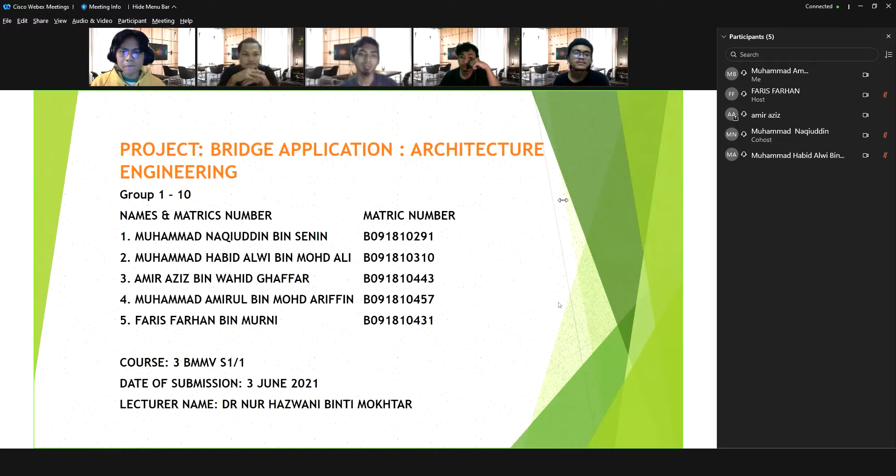For the background, a bridge is a construction meant for carrying road traffic or other moving loads in order to pass through an obstacle or other construction. The required passage may be for pedestrians, a road, a railway, a canal, or a pipeline. Obstacles can be rivers, valleys, sea, channels, and other constructions such as bridges themselves, buildings, railways, or roads.

A bridge is a structure that provides passage over obstacles such as a valley, rough terrain, or bodies of water by spanning those obstacles with natural or man-made materials. They first began to be used in ancient times when the first modern civilizations started rising in Mesopotamia. From that point on, knowledge, engineering, and manufacture of new bridge building materials spread beyond their borders, enabling slow but steady adoption of bridges all across the world.

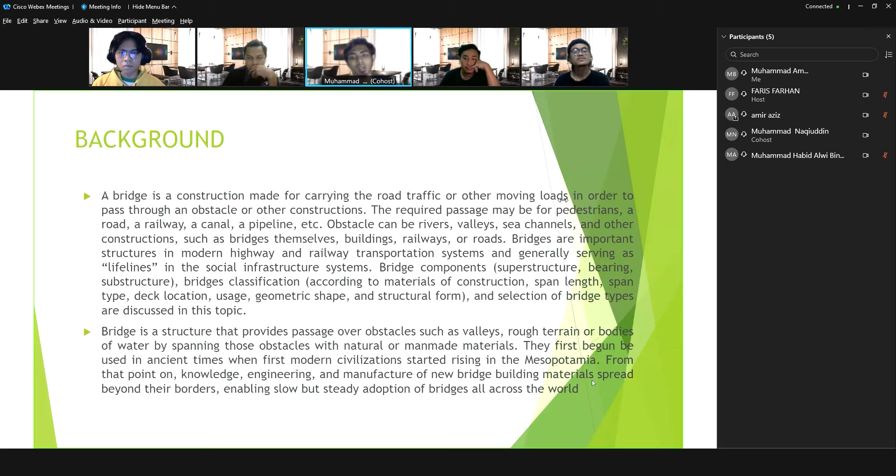For the problem statement, a bridge is a structure that spans a valley, body of water, roadway, rail tracks, or any other obstruction to continuous travel. Bridges are also designed to withstand dead loads and live loads. A dead load is a load that does not change, such as the weight of the structure itself. This load accounts for a significant and considerable percentage of the stress in the load carrying member. A live load can change, due to increase or decrease in traffic and pedestrian loading.

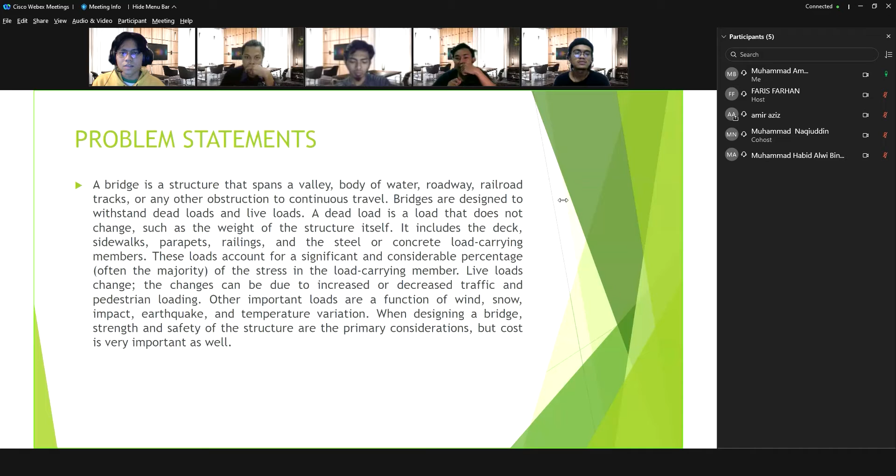For the objectives, we have three. First, develop an understanding of the requirements of the materials used in bridge construction. Second, understand how each bridge structure works to carry the loads placed on the bridge. Third, analyze important aspects of construction such as strength and placement of materials.

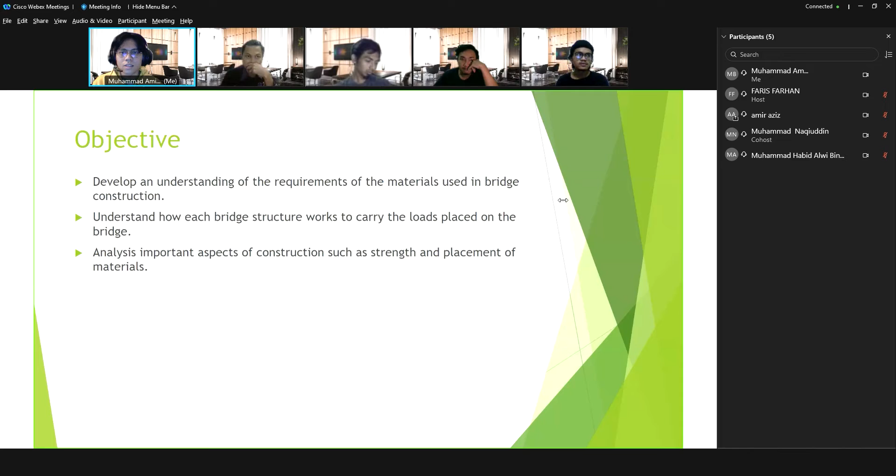For the literature review, we start with materials used in bridge construction. According to Composites and Jin 2006 journal, making carbon fiber composite material into strands and rods and then mixing them with steel bars for bridge construction is the most common application of carbon fiber composite materials. Carbon fiber composite material was made into strands and first used in the construction of a high-speed post-tension pre-stressed concrete bridge in Germany in the early 1990s, where a wedge-shaped bridge anchoring system was used.

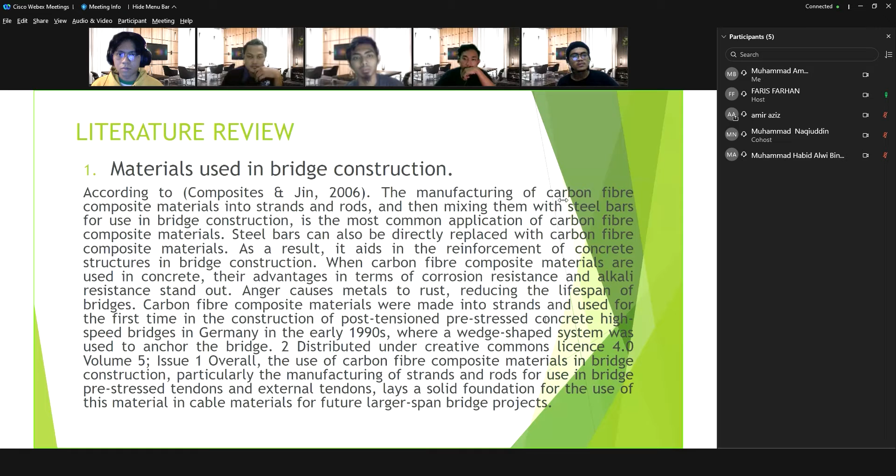Next, how each bridge design works. The bridge model lower chord had four bearing pads to ensure proper truss behavior, based on Bačinskas et al. 2017 journal. Pin and roller supports were placed near the first and 11th floor beams respectively, under the bearing pads. To monitor the deflection of the bottom chord, linear variable displacement transducers were used as displacement gauges (DG).

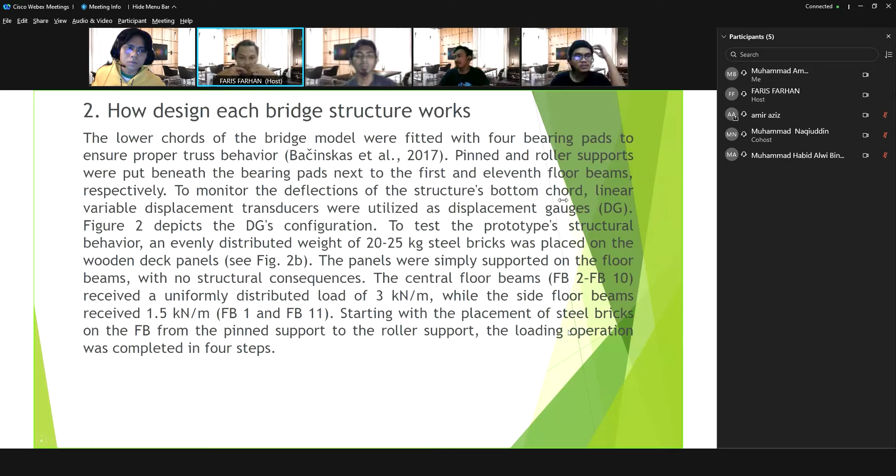The loading operation was completed in 4 steps, starting with the placement of steel bricks on the floor beams, from pin support to roller support. Next, the arrangement of the displacement gauges is shown in figure A and figure C, showing load distribution on a wooden bridge deck.

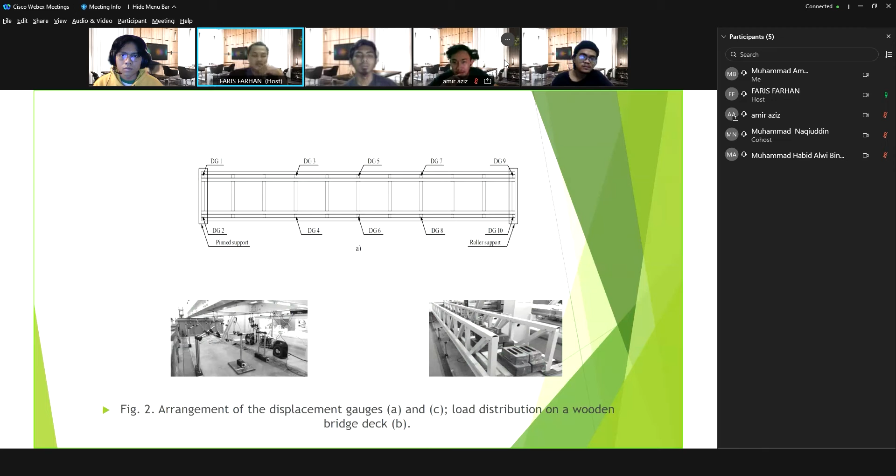For strength and placement of materials, an experimental investigation of a pedestrian bridge model composed of GFRP profile is presented in this work, based on Bačinskas et al. 2017. Post-static loading was used to evaluate the bridge prototype. The maximum load is 13.3 kilonewton. A numerical model was created using the CAD software SolidWorks to compare experimental and theoretical results.

According to the findings, the manufacturer of the GFRP profile announced a conservative modulus of elasticity resulting in increased structural stiffness. When the nominal value of Young's modulus is taken into account, deflection inaccuracy ranges from 29.3 to 43.9%. Considering the experimentally obtained average value, the margin of error at maximal loading is just 0.3%. More research is needed to analyze the dynamic behavior of GFRP composite bridges as well as their long-term consequences.

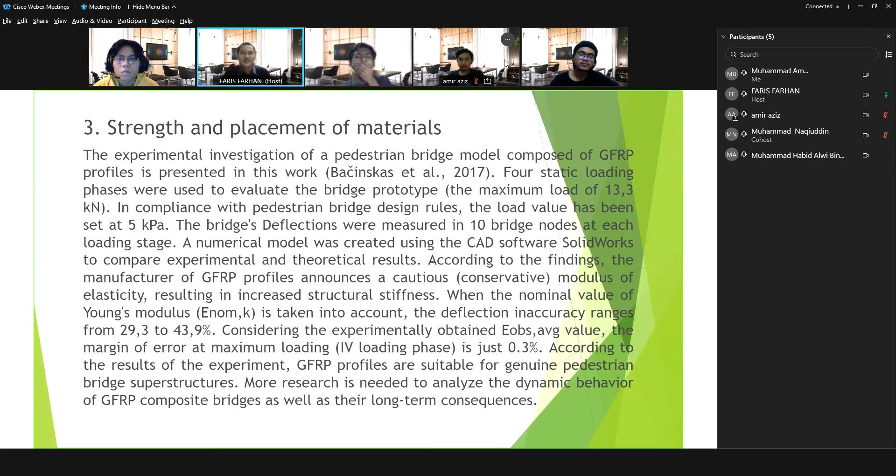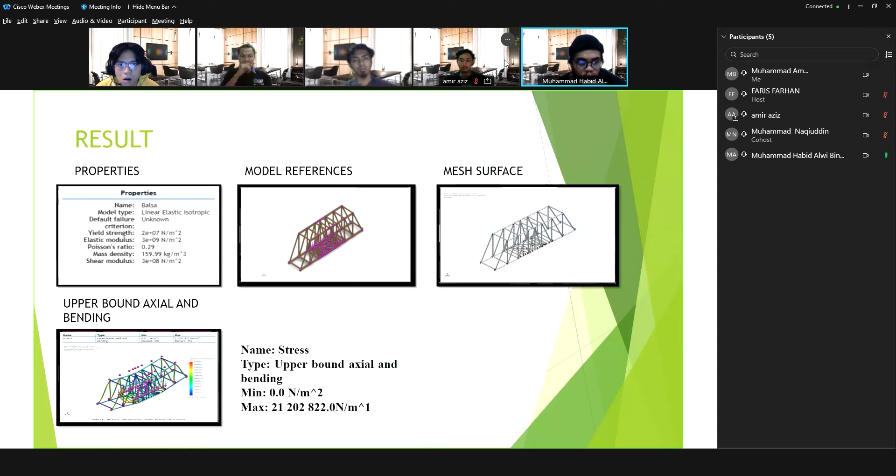For the upper bound axial and bending stress analysis, the maximum stress for this structure is about 21 mega Newton per meter. For the displacement analysis, the maximum displacement for this structure is about 2.53 millimeters, and the safety factor for this simulation is a minimum of about 0.94 and a maximum of 3.0.

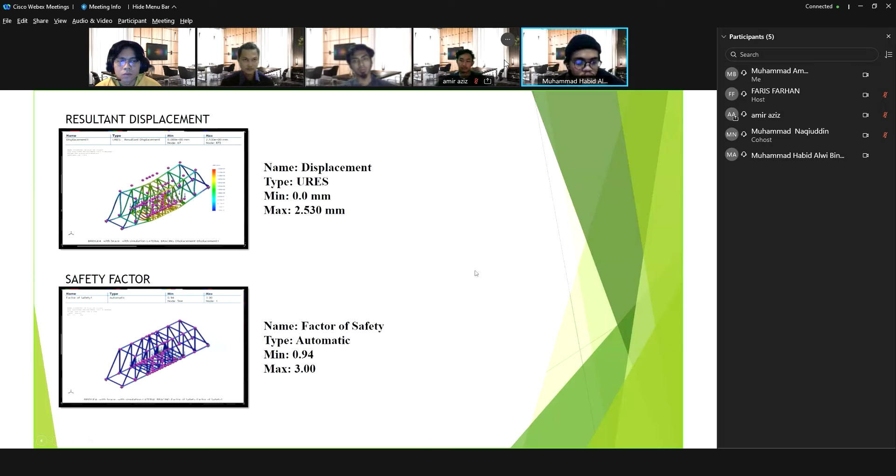For the discussion, the material we used in this bridge is wood, specifically balsa, and we decided to apply 5.832 pound force during the simulation analysis study. For example, in the figure shown below, we can see the value of maximum resultant displacement that occurs in this bridge is between 0.00 x 10^0 millimeter and 2.530 x 10^0 millimeter.

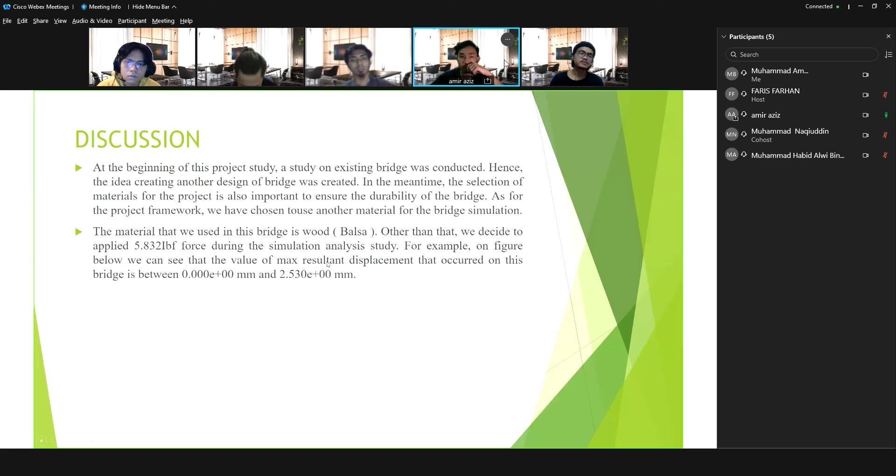For the conclusion, this paper presents the experimental investigation of a bridge model made of balsa material. The bridge prototype was tested under 4 static loading stages. The load value has been selected as 5.832 pound force in accordance with bridge design regulations. Deflection of the bridge was monitored at every loading stage at 10 bridge nodes. In order to compare experimental and theoretical results, a numerical model was developed using the CAD software SolidWorks.